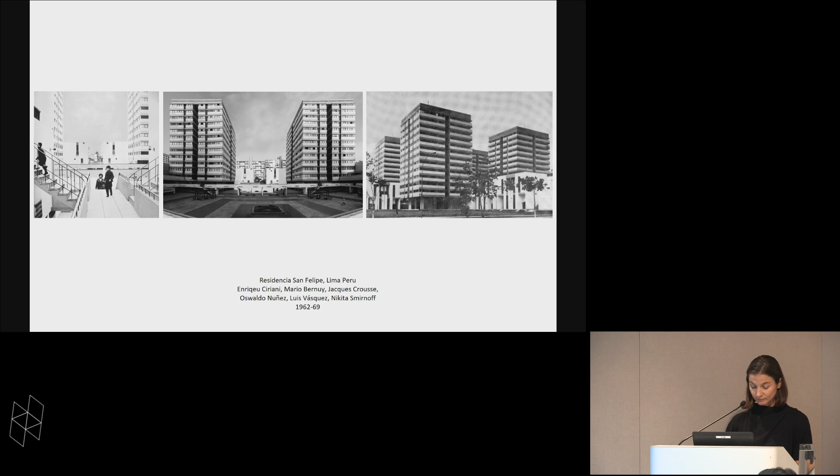Mario Pani's Presidente Alemán Center in Mexico City, 1948, and Residencia San Felipe in Lima, Peru, by Enrique Ciriani and others, 1962 to 69. This is a timeline of social housing projects in Latin America that Mariana Leguía in Lima elaborated for an edition of AD Magazine she curated in 2010.

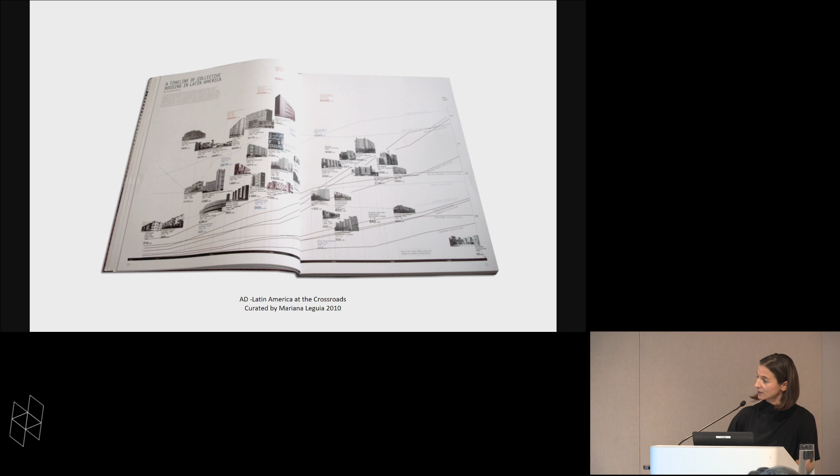It begins with El Silencio project in Caracas, which is the one down over there, 1943, as the first social housing multifamily residential building, and progresses all the way to Aravena's project in Iquique, Chile.

Beyond this timeline, into the last 8 years, social housing efforts continue to focus on the unit itself, with little regard to their location, which tends to be in distant peripheral urban areas where land is less expensive. These are images of recent social housing developments in León, Mexico, Guayaquil, Ecuador, and Caracas, Venezuela.

Why and how aren't these examples reducing urban inequality? The first and obvious answer is that they are conceived to replace, not mitigate, the limitations of informal settlements, which are undeniably real and still growing.

Informal settlements have not, in effect, been replaced, so how can such approaches continue to be presented as mitigations of inequality? Secondly, local authorities tend to simplify the structure of cities and conflate urbanism with housing.

Jordi Borja, a Catalan urbanist who has been involved in numerous urban renewal processes, both in Europe and Latin America, states that from his experience, urban projects and other infrastructure projects tend to focus on a particular sector without maintaining a holistic urban vision. Priority is given to paving streets and housing.

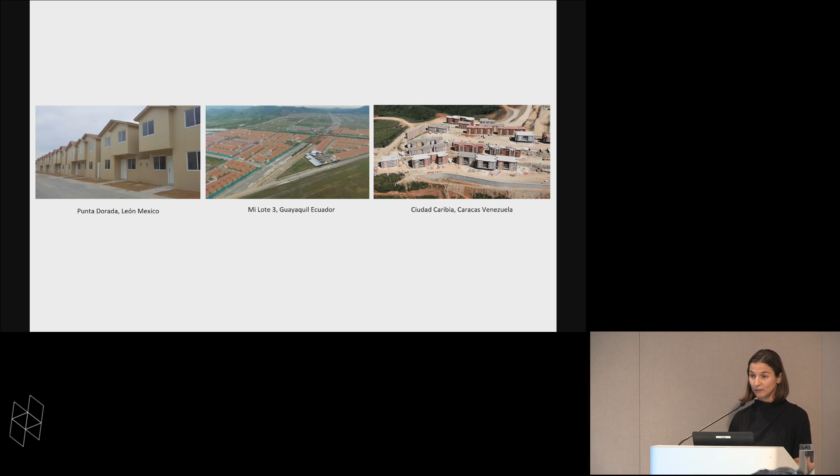Thirdly, formal housing is not an economically viable response to address the magnitude of people in spontaneous communities, and this in and of itself should be enough to question its appropriateness as an official government strategy to address social needs.

In 2014, Mexico reported a housing deficit of 9.7 million units. That's the equivalent of 40 million people, a third of its population, despite enormous investments to increase the stock of homes between 2010 and 2014. There are no official reports on the current housing deficit in Venezuela.

People in the construction industry estimated around 2.4 million homes in 2017. So 10 million people, nearly 30% of the country's population, although massive emigration this past year has likely reduced this number.

Even though we're talking about a third of the population in both examples, housing remains the most championed national strategy to address social inequality. Mexico continues to be a strong supporter of the housing agenda, and there is a whole sector of the real estate enterprise focused on social housing projects supported by government agencies such as CONAVI and Infonavit through sizable subsidies. This investment is consistently justified in strategies that address poverty, with housing models designed by top Mexican architects.

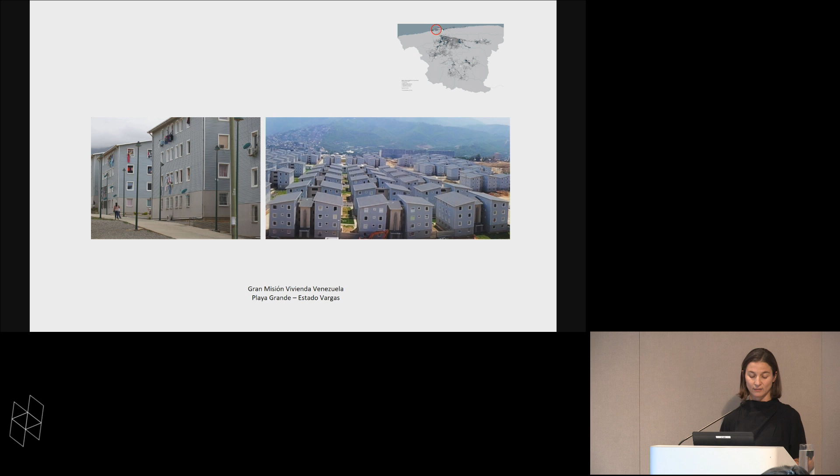As a side note, both the Mexican and Venezuelan projects have been repeatedly denounced for their scandalous levels of corruption and for the poor quality of construction and services of the apartments built. Both examples operate under very different motivations, but they buy into the same positivist discourse and seem to confirm that the tool, in this case housing, has become the default approach to address underprivileged populations in many parts of the developing world. But when you look at cities through the lens of territorial inequality, such strategies are actually counterproductive, as they continue to define territory through internally homogeneous, separate, distinct enclaves.

When the goal is framed to address urban inequality, we find there's a dearth of consequential and viable approaches. A new home does not mitigate existing urban exclusion, nor does it represent a relevant offer for people who may have a perfectly functional home that just happens to be in an informal settlement. The limitations of a home in an informal settlement have to do with exclusion from urban dynamics, access to schools, health centers, jobs, public space, but not necessarily in the housing structure itself.

These exclusive aspects are not only physical, but also present in public policies and urban investments: how funds for public works are allocated, waste management, public services, etc. They are not equitably distributed.

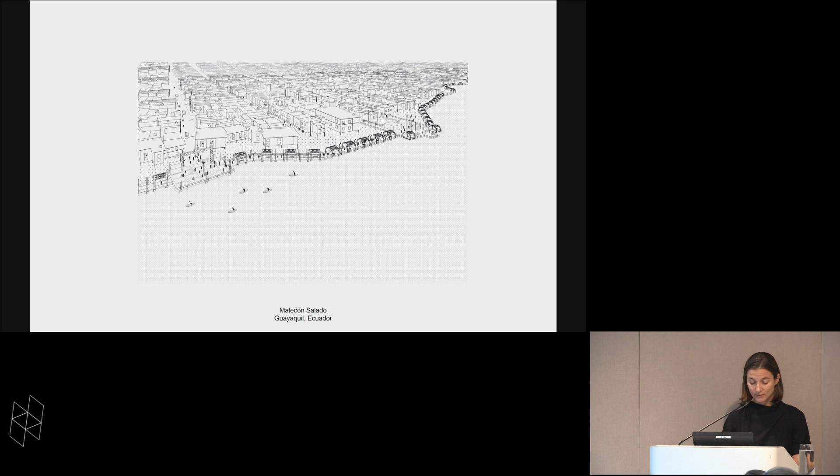The project, built by the municipality, creates an urban front onto the river as a mechanism to control the encroachment of informal settlements into the estuary. People would throw debris into the waterway to gain land, build their homes over this very unsound foundation, and throw their sewage water and waste into the river.

The project relocates and demolishes unstable homes and creates a boardwalk to contain further construction. The wastewater is collected separately, which has reduced the estuary's pollution levels and even allowed water sports such as rowing to take place once again, and mangroves have also started to regrow.

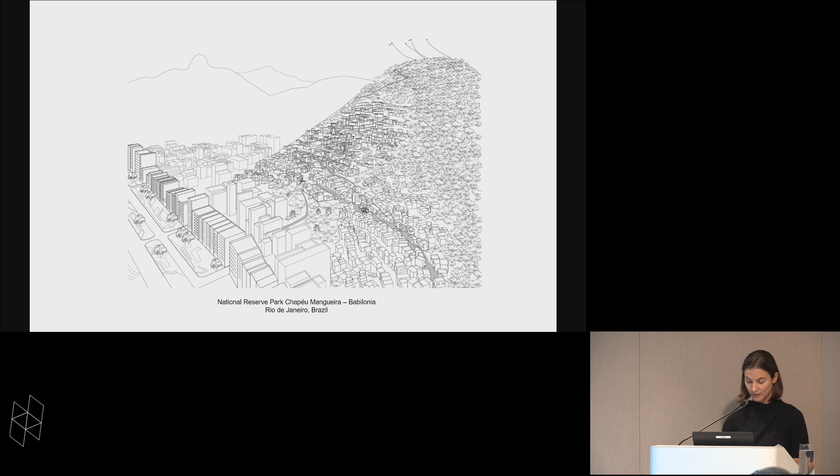The second project is a natural reserve park above the favela Chapeu Mangueira Babilonia in Rio de Janeiro. It is located just north of Copacabana Bay. So this is Copacabana Bay, it's up here, this is the water. And Copacabana would be this part, and here's Chapeu Mangueira Babilonia. It's actually 2 favelas together.

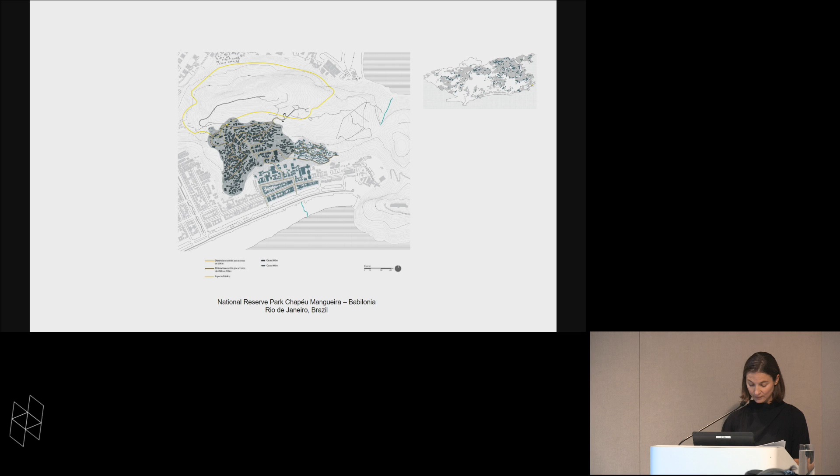So you walk through the favela and ascend, and as you ascend, you reach the natural reserve park over the Morro. It was once completely deforested, and the community, with the encouragement of a civic organization, began a process of reforestation. Today, neighbors offer to guide visitors through the forest park to the top, where some of the most breathtaking views of Rio can be enjoyed.

The Copacabana Beach, Flamengo Bay, Sugarloaf Mountain, and the Cristo on the Corcovado. Kids from the favela are often seen here flying kites. The favela becomes part of the entrance and passage towards the park, and in this sense begins to form part of an urban and recreational experience, both for locals and visitors. So this is the forest at the top.

In these and other examples, first we see how public space interventions attenuate and weaken urban physical boundaries. They even integrate sectors of the city typically understood as opposites. At the same time, they require significantly less financial investment than housing projects.

Secondly, public space within informal settlements also represents a common ground that can encourage or allow social cohesion among different citizens to develop. I don't only mean social cohesion among members within the settlement, that is often already very strong, but I also mean among different urban inhabitants. Settlements are typically read as private enclaves, where outsiders feel very self-conscious. Open public space allows visitors from the rest of the city, as well as the community members, to share a common space.

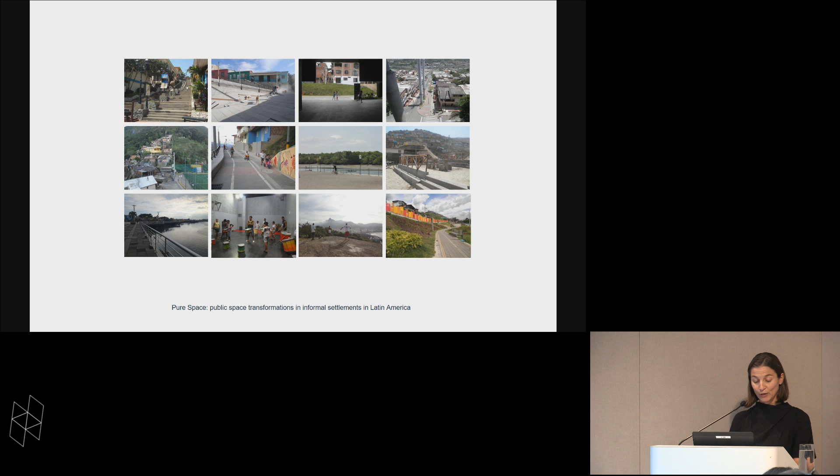They should be considered as operations to mitigate the territorial inequality present in cities and allow housing to shift towards other agendas - for example, ones focused on demographic segments of the population that can handle the financial constraints of formal housing, and in developing countries with greater per capita income, such as Chile.

And now I'd like to share a bit of how our practice emerged and began this line of inquiry in terms of design, research, dissemination, and public policy. Our office is in Caracas, Venezuela, and started in 2007 when I moved there from Rome.

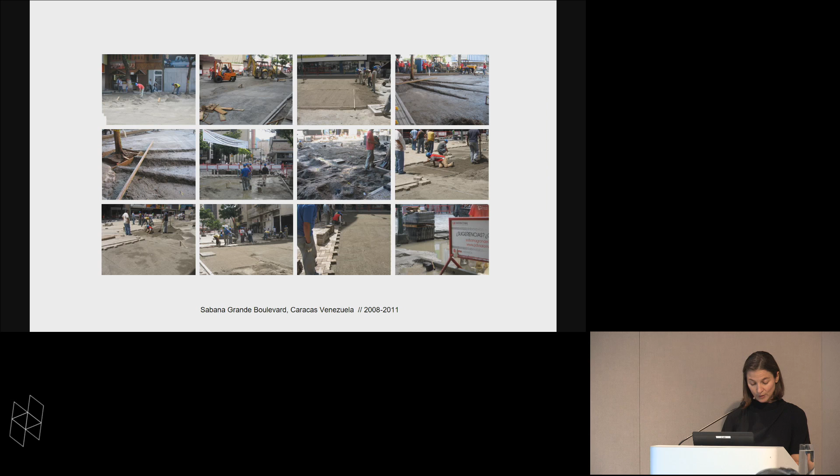During the first year, we worked on 3 projects that really set the tone for the years to come. The pavement and drainage of Sabana Grande Boulevard in Caracas was the result of a competition I won—I say I instead of we because there wasn't really an office to speak of yet—and unbelievably it got built. It is a pedestrian boulevard that traverses 1.6 kilometers of the city and coincides with 3 subway stations. It had been taken over by informal vendors during the early 2000s and was suddenly evacuated rather aggressively in 2006 by the government, and renovated with funding from PDVSA, Venezuela's oil company. This experience brought us a great deal of insight on the pragmatic aspects of designing and building public space.

So these are various images during the construction—difficult to build something while thousands of pedestrians are traversing this on a daily basis. And then Sabana Grande in use today.

I also started working on the Media Legua Church, in a rural setting in the state of Vargas, 2 hours from Caracas. It's a pro bono project that has progressed very slowly at the pace of donations received, and was only recently consecrated this past September. The church was built by members of the community, and it really does represent a tour de force for them. The place now represents the center of Media Legua for the community to use in a number of ways, and the open space in front of it will be configured into a multifunctional public plaza for people of all ages. There's more work to be done—building benches, light fixtures, and landscape—which I look forward to, because each site visit has been the opportunity to learn about the value in rural habitat.

I have gotten to know the community and had a chance to perceive the benefits of living in rural settings. Many of the neighbors actually once lived in Caracas and decided to move to the countryside in search of better quality of life. This is where I started to understand the importance of reconsidering rural habitat as part of the informal settlement discourse. Doug Saunders ably discloses in his book Arrival City how, in many respects, informal settlements are the habitat for the family member working in the city and sending money back to his or her village.

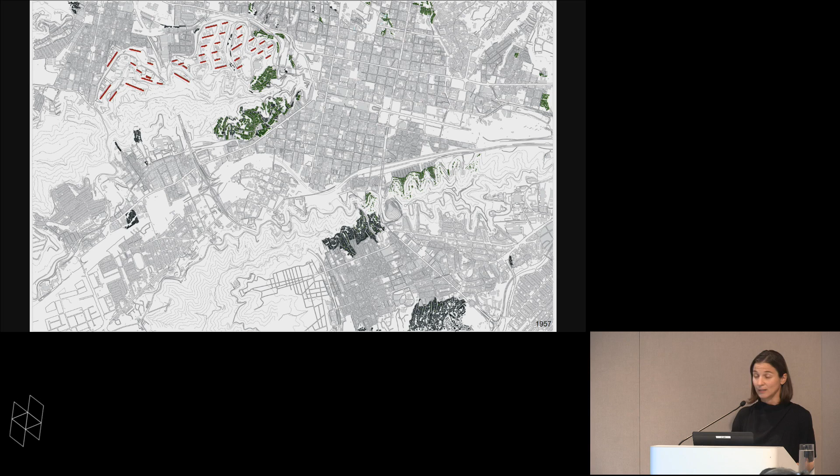And between '57 and '66, they grew, as you see in the map. And this is more or less what happened in that area. So the left picture is 23 de Enero in '58, and the right side is a more recent picture.

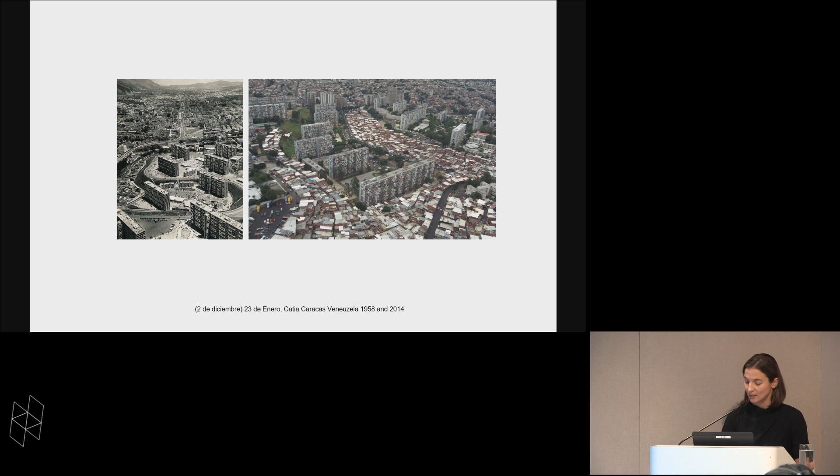It was also an exhibition that traveled to at least 7 sites, and we invited schools for workshops to talk about the city, where they live, what informal settlements are, and their proximity to references they know. We are keen to continue creating these educational opportunities for children to reflect on the built environment.

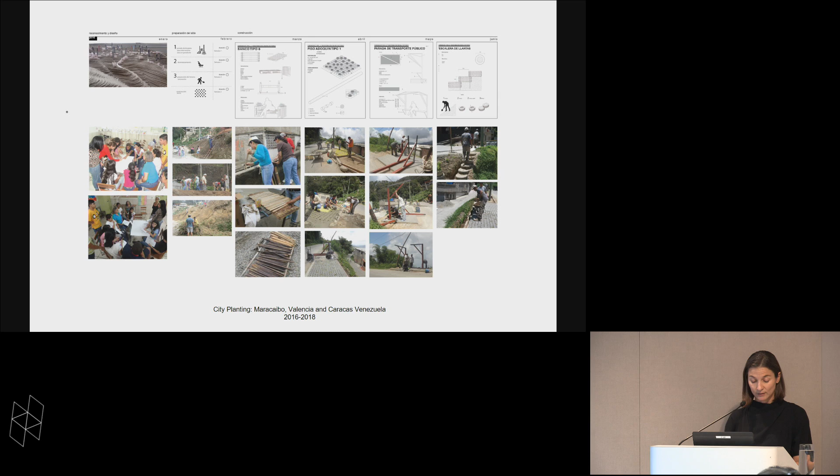We were asked to join an NGO, FUDEP, with which we had worked before in La Morán, to embark on a project funded by the private sector, Citibank, so not the government. The program is called City Planting, as we basically started from scratch, designing methodologies to engage the community, create awareness regarding their surroundings, and begin to form ideas about how it could be transformed.

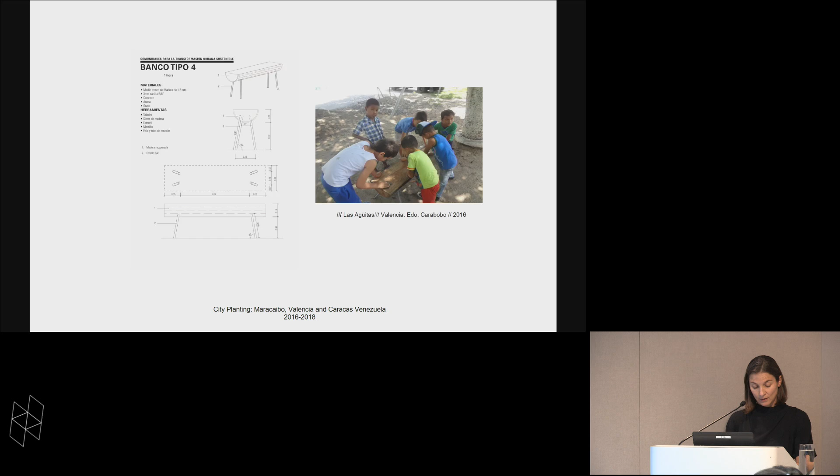We found that games and using outdoor spaces was much more successful in drawing people in than meetings. We also created simple designs for elements that make up public space: stairs, benches, canopies, swings, bus stops, pavement, using readily available and often recycled materials. And we also did a lot of planting with neighbors.

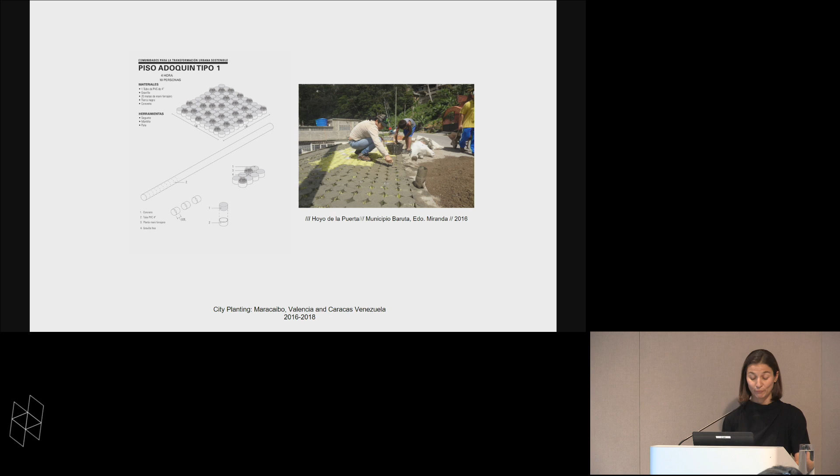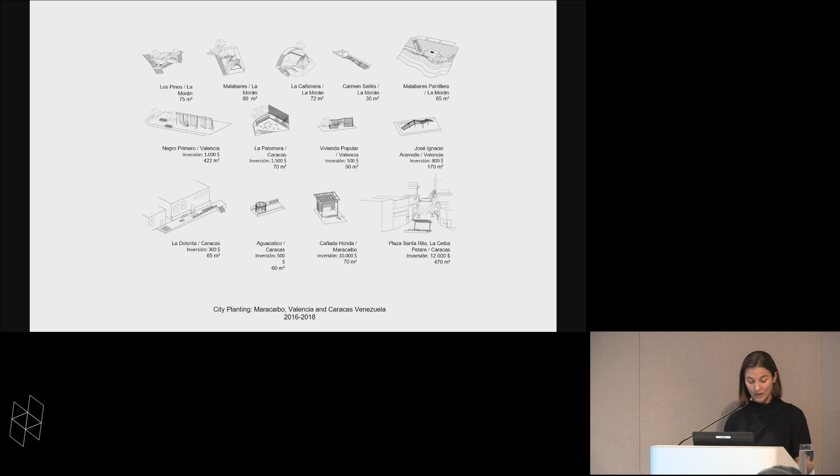Over the course of 3 years, we were able to work with 18 communities in Maracaibo, Valencia, and Caracas, and build 18 modest spaces with them. I will share 2 of these experiences, one in Caracas in 2016 and the other in 2016 and 2017. The first is La Ceiba, Barrio Unión Petare, on the eastern side of Caracas.

The Plaza Santa Rita was in many respects already being used as a de facto public space, with a basketball court cobbled together over an inclined surface and an improvised bus station. So basically, that's what you see right here. These jeeps, as they call them, gather there and wait for passengers.

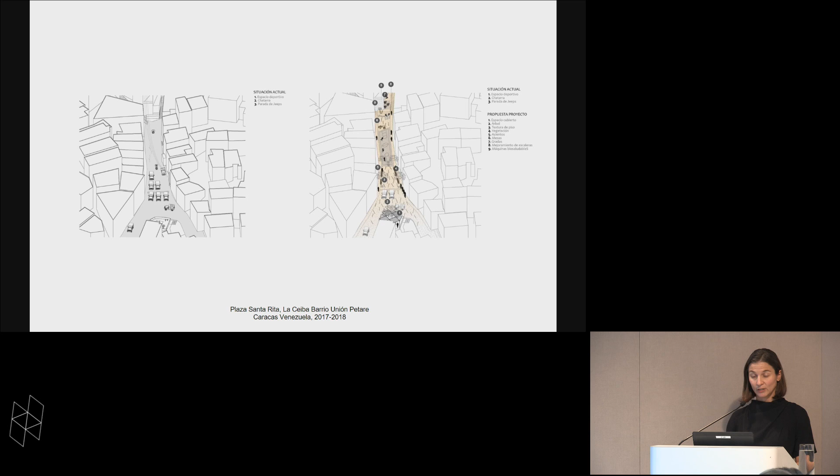We began a series of activities, much like the ones in the photographs I just shared. And then we went on to formulating the project with the community. Their concern was to open the space up to more segments of the population so that not only teenagers could play basketball, but also smaller children could feel it was their own. Now they make a beeline straight to the slide, stand in line, and go down again and again.

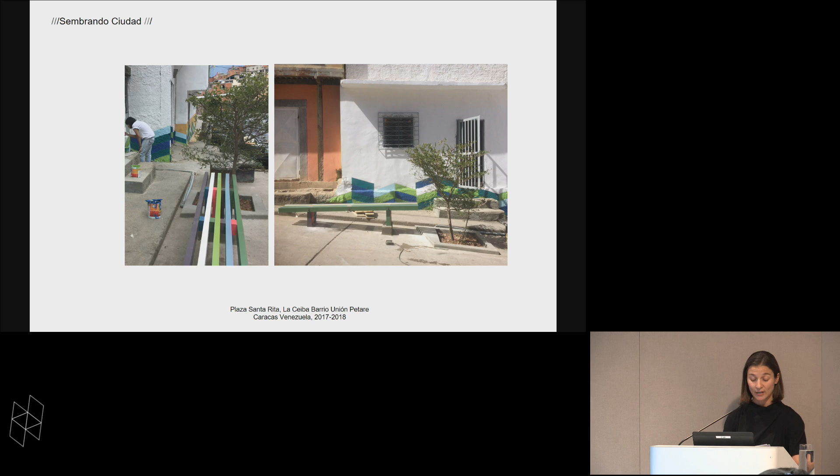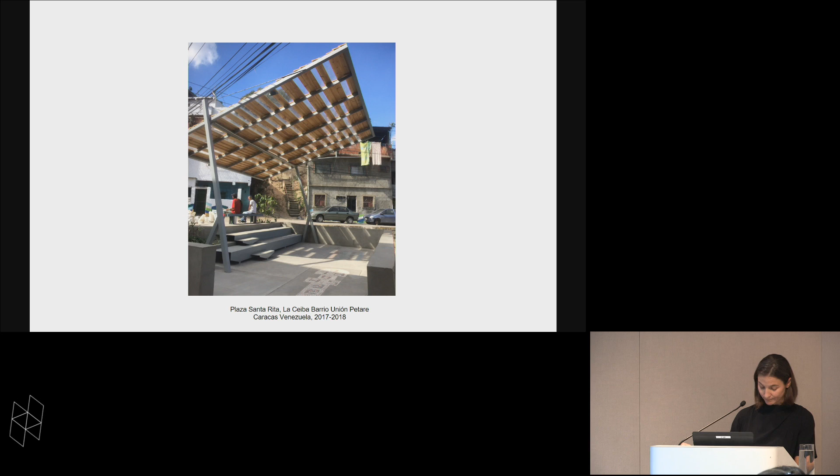We made it purposefully steep, and the cement is very slick, so it's a really good slide. There are benches that will be shaded at some point with trees we planted, for parents and senior citizens to gather, and a canopy in a protected area. This is what it looked like originally and what it looks like now, where children can play hopscotch on pavement patterns made with recycled bottle caps they helped build. You can maybe make out a little bit of it here in the bottom. But it is also a place for outdoor movies projected onto a neighbor's sidewall, and a place for religious ceremonies

and community markets. The second project is in La Palomera, towards the southern part of the city. This time the community focused on a waste dump, roughly right here, that had been there for 30 years. The project centered on waste management and the transformation of the space into a modest plaza. It was also part of a larger idea, but this is really where the built project is focused.

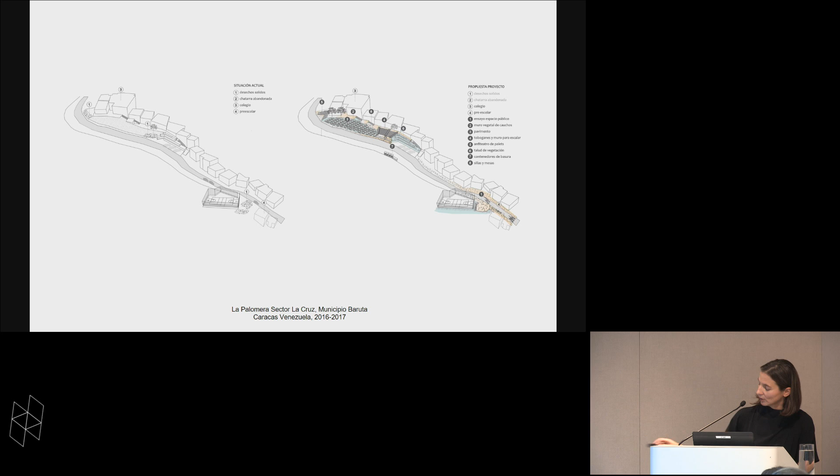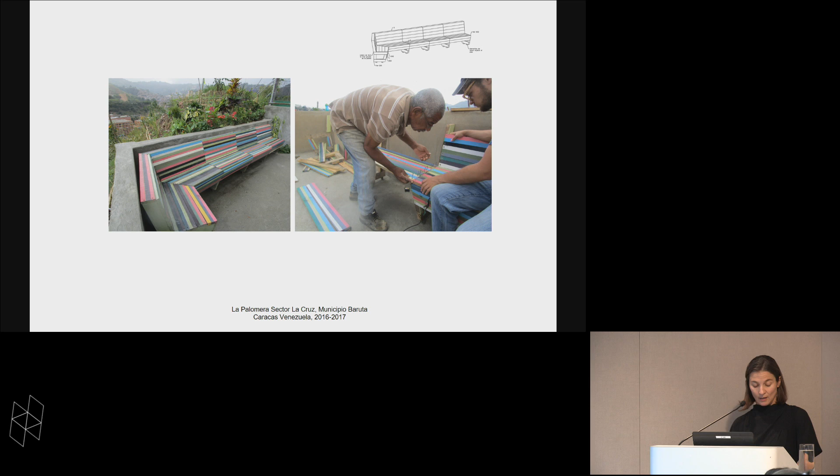The design includes a pavement motif made out of recycled bottle caps that allowed children to participate, and this is all the kids participating that day, as well as a colorful bench made of recycled wood pallets that a carpenter, Señor Augusto, helped us build, and they were painted by the children. Finally, beans were planted by a neighbor just in front of the fence that separates it from the basketball court, and within a few months the beans grew and provide shade during the afternoon hours.

After 18 small projects, 6 every year, we were able to gain a lot of experience identifying which strategies were allowing us to better communicate with the community. We also produced significant transformations, not only physical ones, but also in the community's sense of self-worth. And it is fantastic to listen to Señora Martina, who's lived in La Palomera 60 years, tell the story of how her new plaza was made.

However, we became increasingly worried and aware of the fact that this work remained insular, and felt the next step would be to forge opportunities for people from the rest of the city to know and experience, for example, La Ceiba or La Palomera. Informal settlement inhabitants circulate throughout the entire city regularly. The challenge is also to build bridges that give everyone else reasons to visit the barrio and incorporate these places into their mental urban maps.

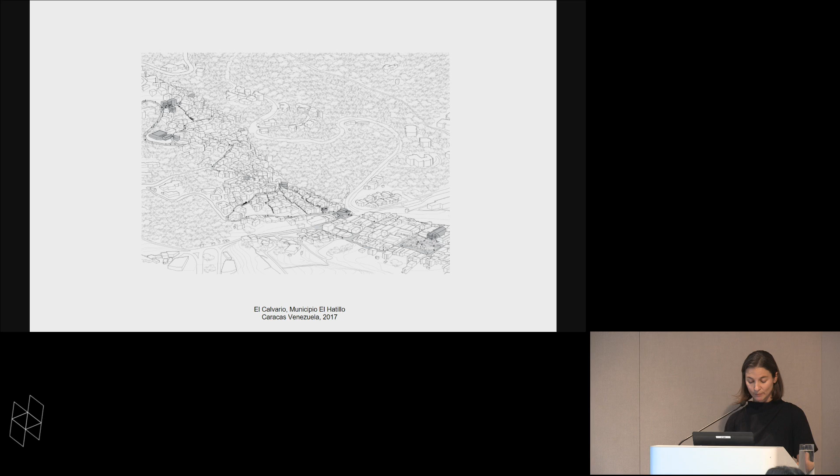For its third edition, last year, we chose to celebrate a path through El Calvario that would lead people from the Simón Bolívar Square—this is colonial fabric in the city, and there's the Simón Bolívar Square—up to Plaza La Cruz, where a live band plays and people dance. It was meant to serve as a series of clues or links that would encourage visitors to find all 7 canopies suspended over the path.

It also played off of the artistic character of the electric wires that commonly crisscross the sky. We invited people to upload photographs with the hashtag Cubierta El Calvario to social media so that others might grow curious and decide to come see the canopies themselves in El Calvario.

We're also exploring ways to alter the way we work with communities through 3 new projects we were invited to design and build with another NGO called Mi Convive, as part of a program funded by the Swiss Embassy in Venezuela. Among Mi Convive's many projects, one important one is a network of soup kitchens for children, an initiative called Alimenta la Solidaridad, close to reaching 60 such centers, all privately funded. We're currently working with 3 of these spaces in 3 different informal settlements: Chapellín, La Vega, and Antímano.

These are all closely linked to the soup kitchens, and what we're experimenting now is getting more quickly to the moment of building the public space with the community, so we can continue working with them once the spaces are built. We have more time post-construction to accompany the community to use, maintain, and program these spaces. We also want to plan activities that will draw larger audiences from surrounding areas.

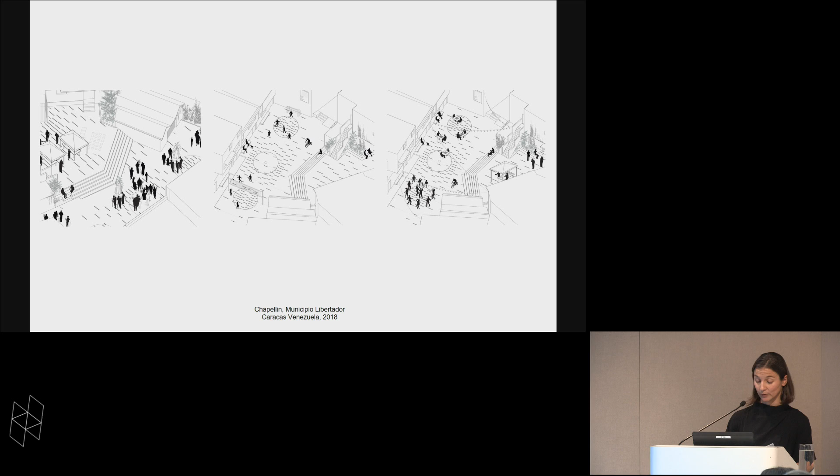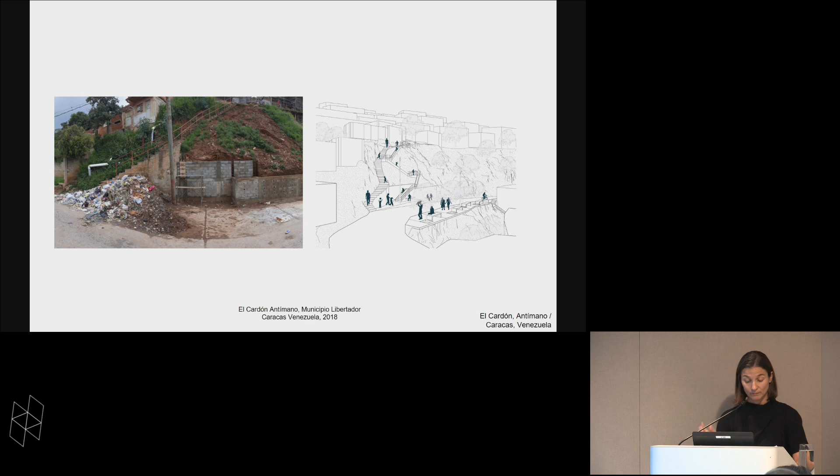Another project in Antímano will focus on eliminating a waste dump with an integral waste management program, and convert this steep slope into a series of slides for children. As you can see, it's where people have also learned to leave their waste. And here are the children overseeing their project as it's getting built.

A year ago, we registered our own NGO, Enlace Fundación, in order to be able to explore other types of projects and programs, and write our own proposals for funding. We also want to channel future research and dissemination efforts through this entity, as well as initiatives focused on influencing public policy. Through private donations, we have started to configure new public spaces along the southern ridge of La Palomera.

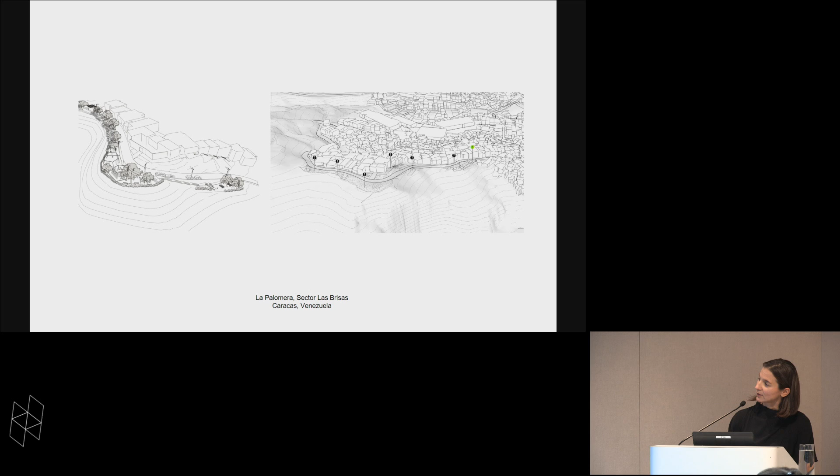So there's La Palomera again, and this entire ridge here really has a lot of potential. These are early sketches of what it could configure, and these are images of different points along that ridge. We chose it for the obvious potential it has and for the relationship we already have with the community.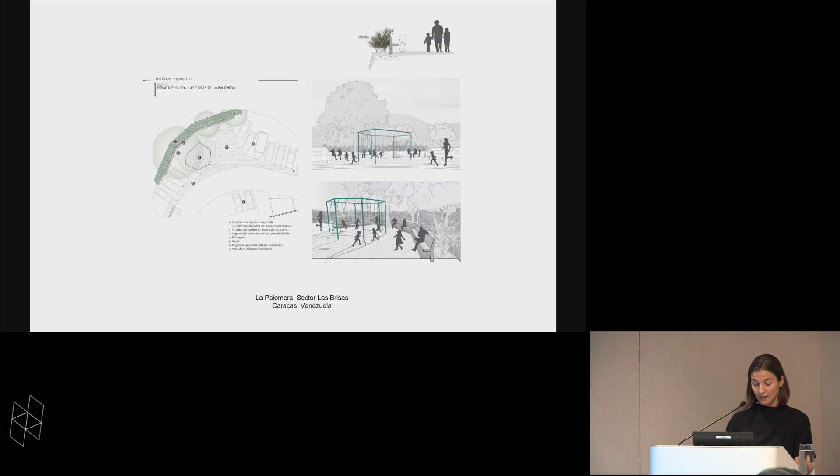The first intervention addresses the issue of vehicles occupying important free spaces. This is kind of contradictory—we don't have any space for public space, but we have space for parking cars. So we were able to negotiate moving 5 cars in order to create a modest playground under an existing jabillo tree, which translates as a possum tree.

Over the past 5 months, inflation has gotten much worse in the country, and the money we had raised will no longer be enough to cover the park's cost. Nonetheless, we have started with the perimeter bench, and this is really important to the community because there's a kind of high level change after it.

And so we started with the construction nonetheless, and in order to save money, we're filling the formwork with plastic bottles to allow us to use less concrete.

In January this year, we formally presented a proposal to the U.S. Embassy in Venezuela to support a program that would essentially take them for the first time into an informal settlement in Caracas. And 9 months later, we feel very fortunate that it was approved, and we have now basically hit the ground running.

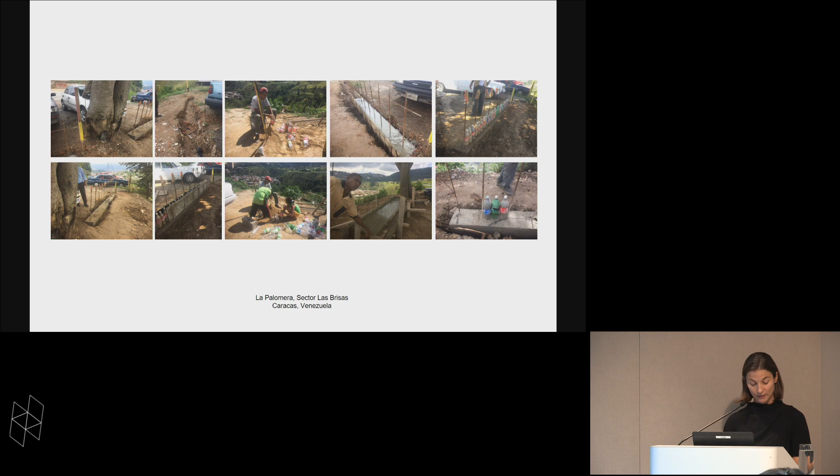The project is titled Urban Awareness and will take place in La Palomera, giving us a chance to explore new approaches toward many of the issues regarding urban integration that we have already been discovering. For example, we will have a lecture series in La Palomera under the title Art, Pedagogy, and the City, and we will promote this event throughout the city to encourage widespread participation.

And we will be collaborating with a number of other civic organizations in the city. We are also planning an exhibition that brings together ideas that the municipality, academia, and the community itself have worked on over the years.

We'll also include a 1:100 scale model, a really big one, of La Palomera, and the intention is to create scenarios for shared conversation regarding the settlement itself, but more importantly, how it is perceived, approached, and integrated with its surroundings. Lastly, we will curate an open-air museum where artists and the community will freely express reflections and critiques on the nature of integration, or the lack thereof, experienced in La Palomera.

A French-American artist, Justine Graham, and Venezuelan artists will participate in the Rearranged architecture tour that links Baruta Center, which is formal, and La Palomera, as an experience that links both fabrics.

I also believe it is important to take advantage of this research and experience to shape public policy, which is currently very weak or somewhat outdated with respect to informal settlements. Much was done toward incorporating the city's barrios into the overall urban discourse in the 90s by Josefina Baldó and Federico Villanueva through the Plan de Habilitación Física de Barrios. But its focus was on improvement, not integration, and somehow oddly it advocates strategies more appropriate of car-centered urbanism. Times are now different, and we have very little resources and an obvious division structured into the city.

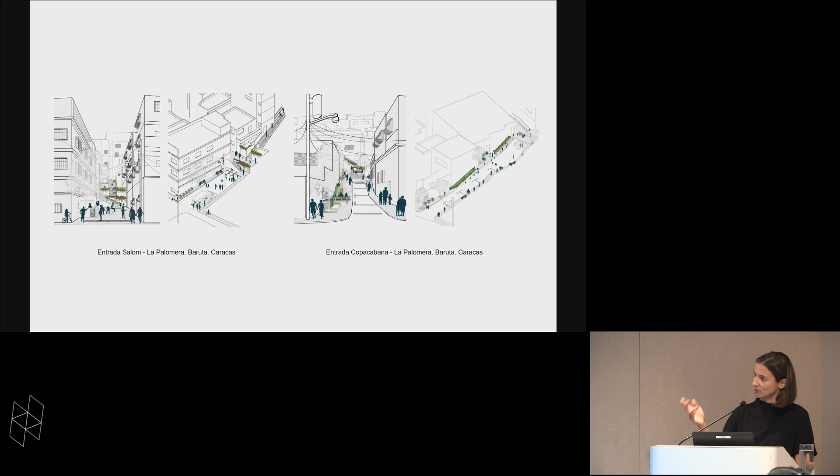Currently, these are images of what those entrances could look like. We are working to organize another meeting of experts as part of the embassy project, and we hope this will move public policy along at the Baruta municipality level, but also national government.

It was once stipulated by Congress in the 90s that 6% of the nation's funds should be allocated towards informal settlement improvement. We want to revisit this law and suggest amendments to it, with the intention of shaping new public policy that considers public space making as an investment to advance urban integration. We would eventually present it for consideration in a legitimate National Assembly when and if future scenarios allow it.

So now to end. Up against such compromised circumstances in Venezuela, the mere gesture of formulating alternative urban interventions through civic forces and more modest resources could seem marginal at best, or even naive. Today, the work we do is perhaps no longer a logical consequence of our interests and research, but an obstinate and even stubborn survival effort. The truth is that getting through each day has become so challenging, people no longer interiorize what is happening. Rather, everyone has learned to cohabitate with hardship through any and all available defense mechanisms.

Among them, there is one Federico Vegas, a famous Venezuelan writer who is also an architect, recently narrated in his article Fascination, which is astonishment or stupefaction that simply paralyzes. He argues that news today on what is happening in Venezuela is so absurd and extravagant that one remains entranced or hypnotized. Fascination is juxtaposed with attention, where the first is passive engagement that constantly seeks out new stimuli, much like an addiction, being hooked on Twitter searching for the next alarming occurrence. Attention is connected to discovery and a readiness to formulate questions and find answers.